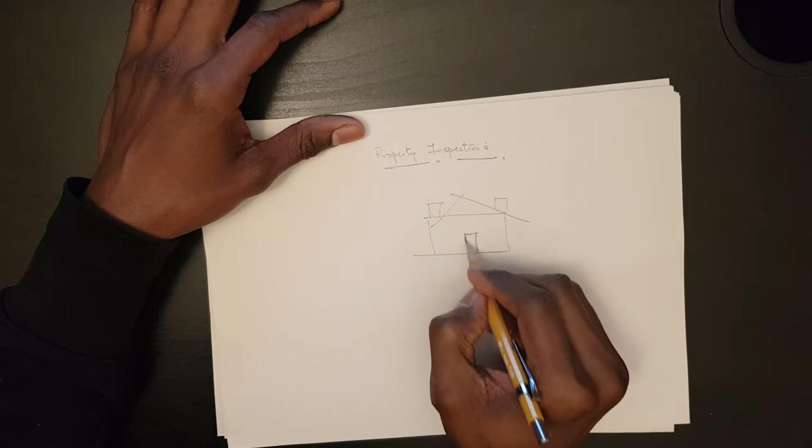You have probably heard the saying that you shouldn't judge a book by its cover, or you shouldn't judge a person merely by their appearance, or you shouldn't judge things on first sight, or that image is not everything. I will say that in general, whilst that advice is understandable on a generic basis in relation to relationships, people, and life, when it comes to investing, that is one piece of advice that you have 100% full permission to go against.

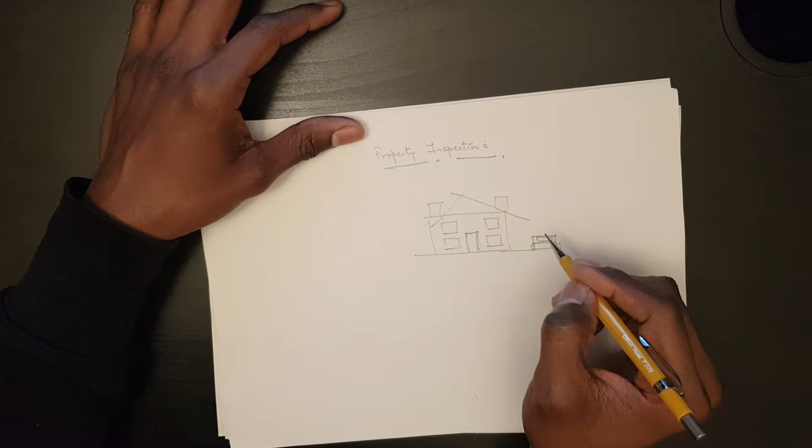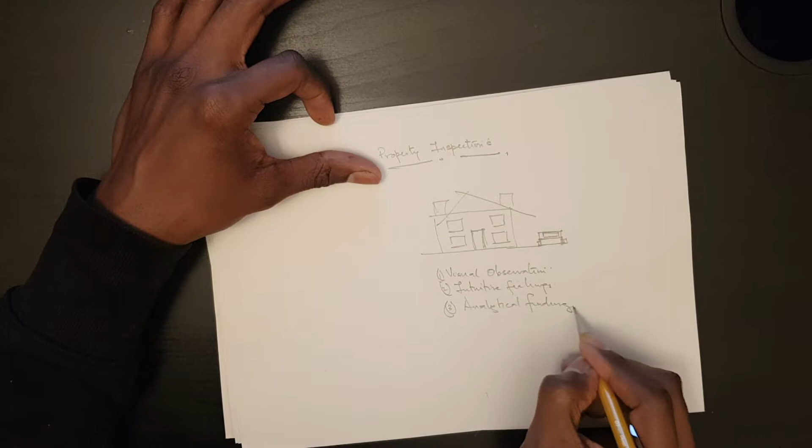You should always and you must always judge a building based on three things. One is your visual observation. The second is your intuitive feelings. And the third, and in my opinion one of the most important, if not the most important, is your analytical findings. These are three things to keep in mind when you're carrying out a property inspection.

So I'll try to build on this, but I believe you already have a relatively sound understanding of buildings, and that has come from living in a building, studying in buildings, working in a building. So what I will try to do is build on the existing understanding and knowledge you have about buildings, and even more importantly, build on the power of your observation and your experience living around structures.

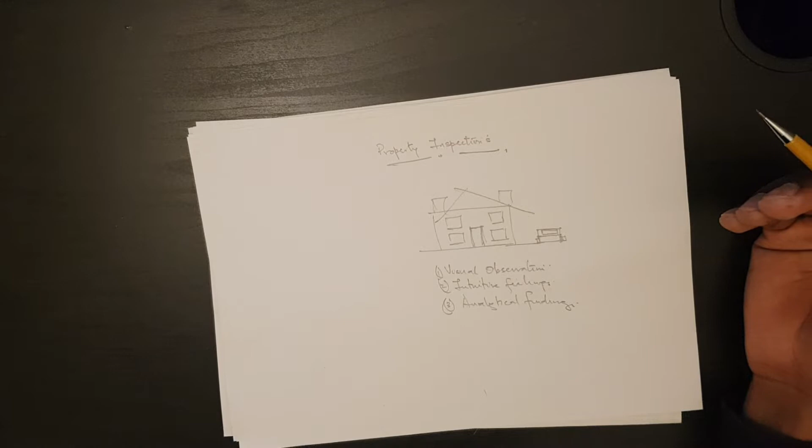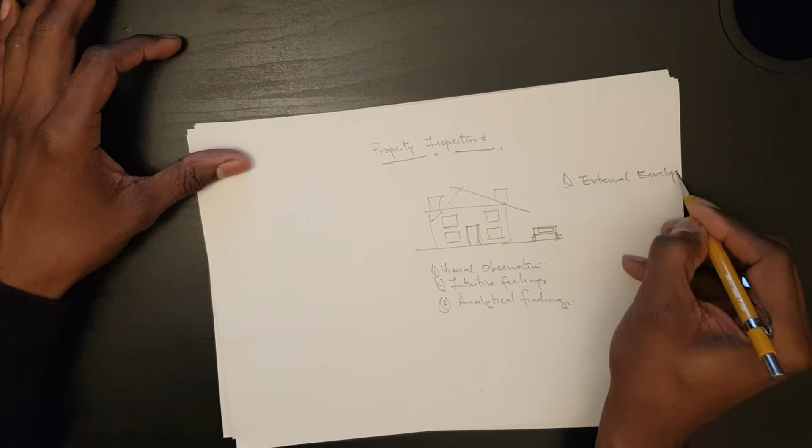Now, a building generally is made up of several parts. So think about this sketch that I have done. The first part is what we call the external envelope. The external envelope is the part of the building that encloses the building: roof, structure, doors, windows, etc. We call that the external envelope.

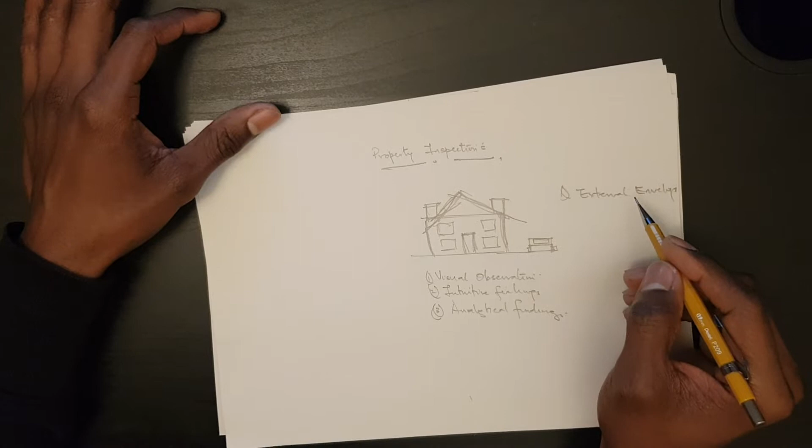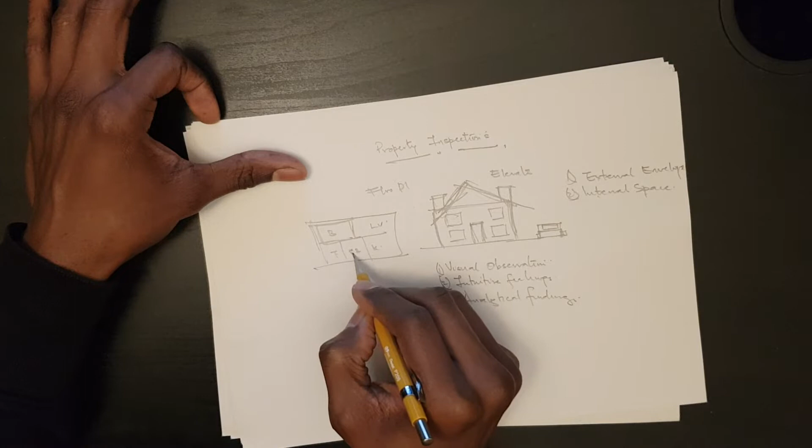The second part is the internal spaces. If this was the elevation and this was a floor plan, the internal spaces would be bedroom, living room, toilet, kitchen, spare bedroom. These are the internal spaces. And number three is what we call the installed services. So a building comprises the external envelope, the internal spaces, and the installed services within the building.

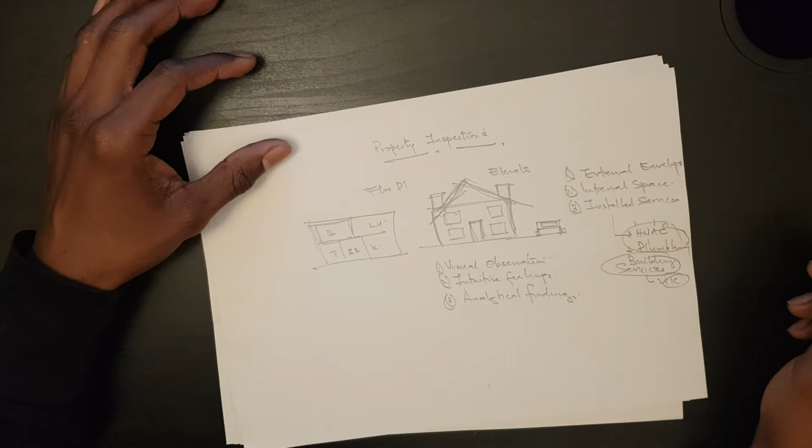The installed services in the USA, or rather in North America, are called HVAC: heating, ventilation, air conditioning, and comfort cooling. And this would also include plumbing. In the UK, we generally call them building services. This is UK terminology; this is US terminology. Building services includes all of the services that serve or supply any form of infrastructure to the building, or sometimes in the UK, depending on the type of building, it's called MEP: mechanical, electrical, public health. And that comprises the installed services.

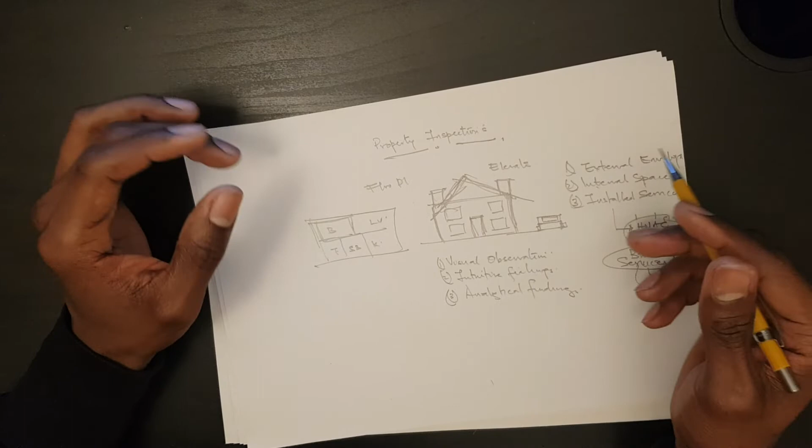Now, for ease of reference, as we go along in today's session, when I say building, I am going to include things such as the land, the structure that sits on the land, including any form of boundary walls, fences and gates, just so that I don't have to keep repeating numerous words.

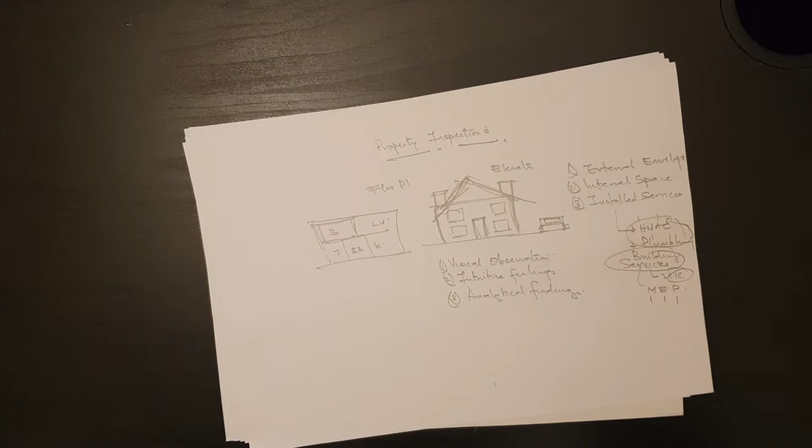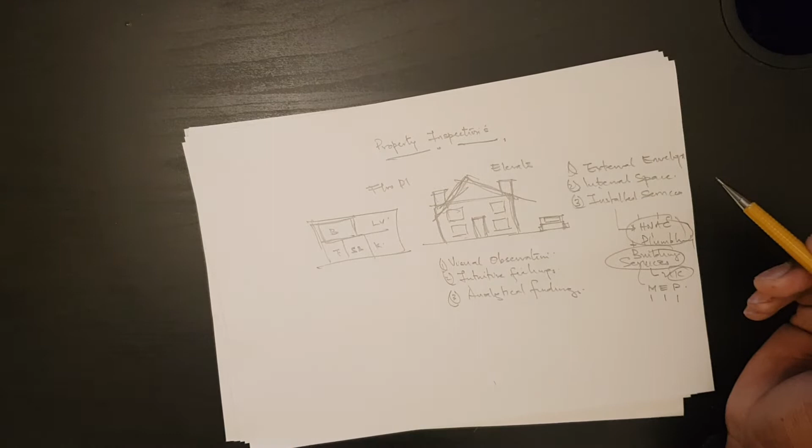Now, this is a very, very important statement I'm making, so try to zero in on it. When you inspect a property, if you're looking to buy a property, the purpose of your inspection is to ascertain the condition of the various parts of the building, and then to determine the current value. So you're looking at condition, value. Call this A, B. C is you're trying to ascertain the life expectancy.

D, you're trying to ascertain the amount of repairs needed. And then E, finally, you're trying to estimate the cost of all repairs that are needed to the building. So these are five specific focus areas: the condition of the building, its current value, its life expectancy, the repairs needed, and the estimated cost of all those repairs. So keep that in mind.

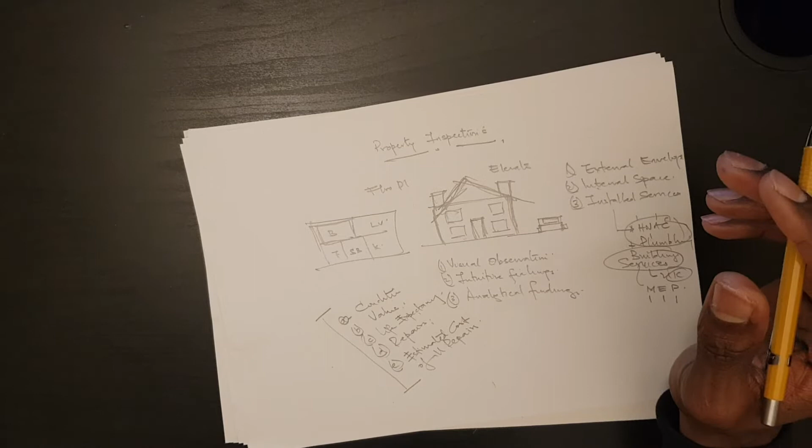Now, if you are a first-time buyer, or if you are purchasing a property with the aid of a mortgage, then your lender will usually arrange for an inspection to be carried out on the property by a competent person. I'll try to explain the reason for that in some detail as we go along. Usually the competent person would be a building surveyor or an engineer.

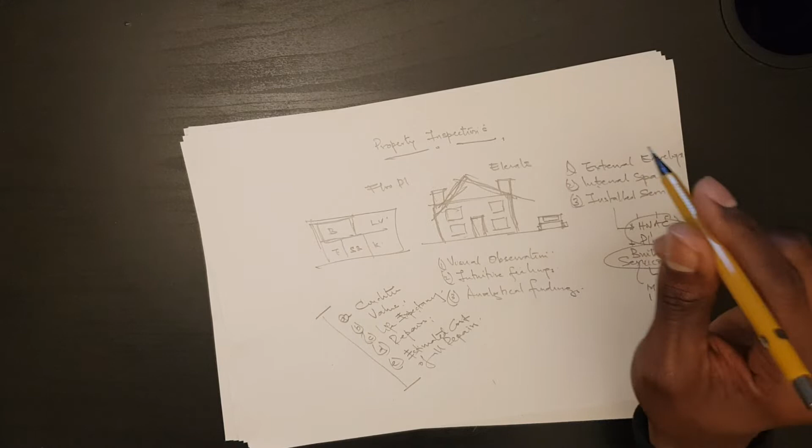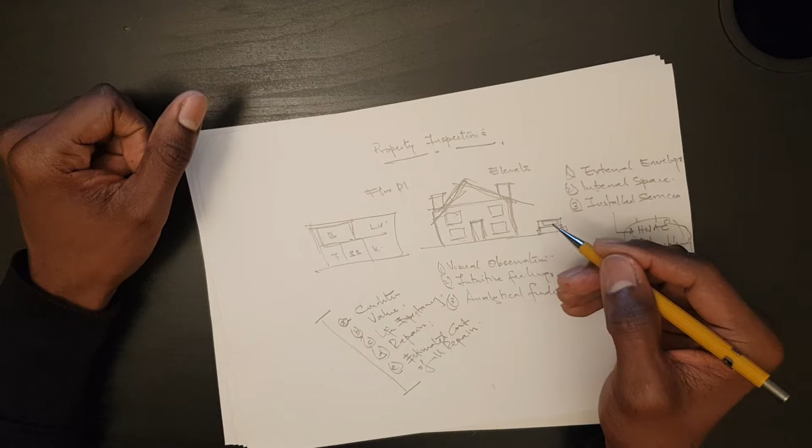Now, if your lender does not commission someone to inspect the property, it's up to you to insist that one should take place. There is a mistake that is often made by first-time buyers or inexperienced investors. People are trying to save a few pennies, and they will normally go for what we call a desktop valuation, or they might go for a home survey.

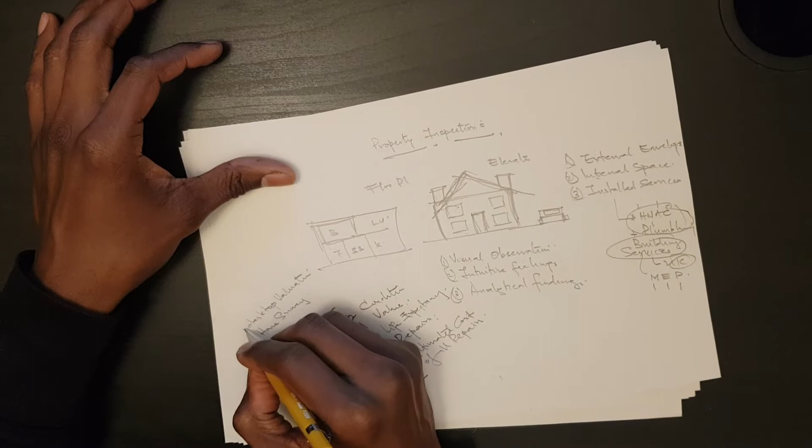All of these are several types of inspections or valuations of the property. Some others might go for what we call a building survey, or some might go for what we call a structural inspection. Each of these have different levels of technical scrutiny. As you would imagine, in descending order, the quantity and quality of information increases.

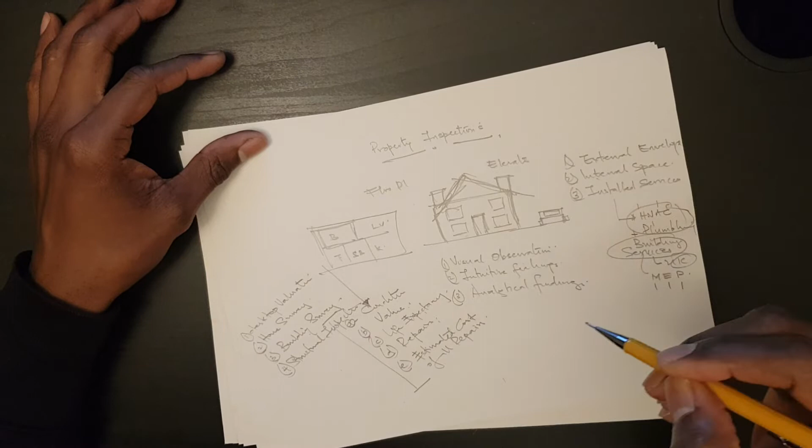So the least thorough inspection is the desktop valuation. This is where someone sits down on a computer and, having looked at the photographs of the property, they decide what they believe the property is worth. And they're doing this on behalf of the bank. A home survey is when they actually come down, but it's very, very surface. It's not detailed. A building survey is a more in-depth inspection. A structural inspection is more of a thorough inspection.

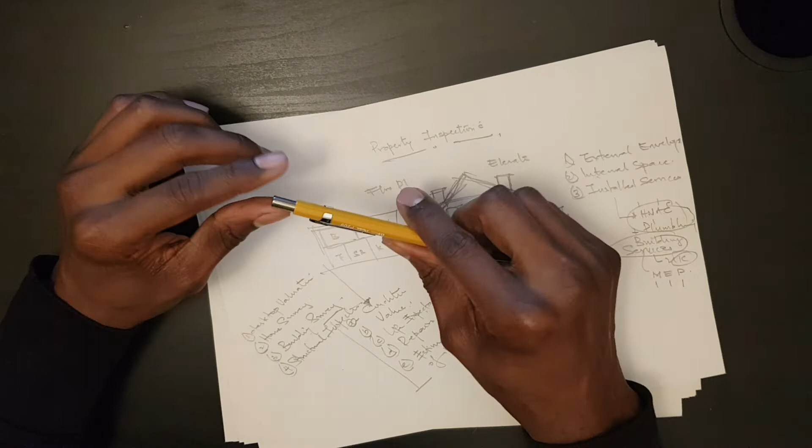So I'll go back to what I said. If you're purchasing a property with the aid of a mortgage, usually the bank, or the lending company, should suggest that you carry out a minimum of a home survey. I would always recommend to you to do something more. But let me just stop there and move on, and I'll come back to this shortly.

Now, if you are purchasing a property without the aid of a mortgage, so you have two buying options. You have those that buy with the mortgage and those that buy without a mortgage. If you're buying without a mortgage, the responsibility for securing a competent person to carry out the works on your behalf will be yours. The bank will not suggest or recommend, because the bank is not involved in the purchase.

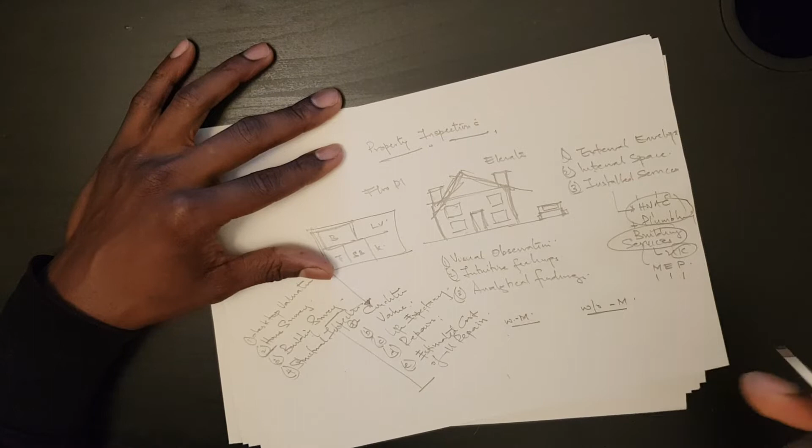Now, irrespective of your funding arrangement, whether you are buying with a mortgage or without a mortgage, I would always encourage you to obtain a full building survey. A full building survey. I would invite you to do this rather than a home buyer's survey, or rather than a valuation survey. Between a desktop valuation and a home buyer survey is what we call a valuation survey.

A valuation survey is even less technically detailed in comparison to the home buyer survey. So I would encourage you to always obtain a full building survey rather than home buyers or valuation survey. And the reason is because a full building survey is more detailed and it provides you with better value.

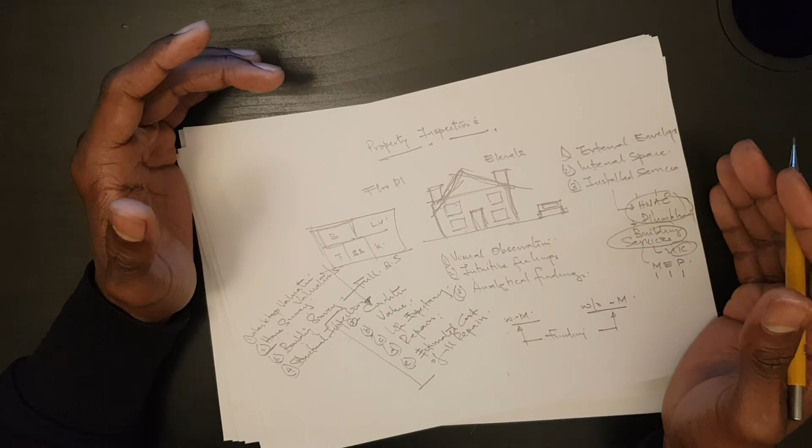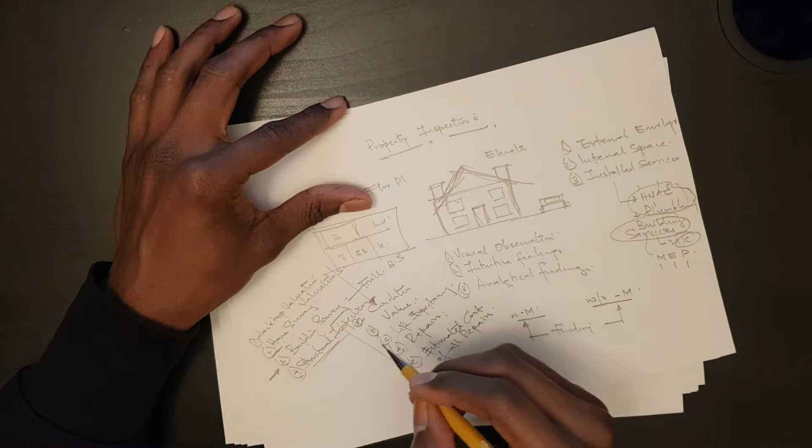If you are buying a period building or a large building, or you're buying a building as a whole, or you're buying a building in parts, if that part of the building you're acquiring is part of a much larger building, I would always instruct you, and I would always recommend a structural inspection. Now let me say that again. As a minimum, you should be carrying out a full building survey.

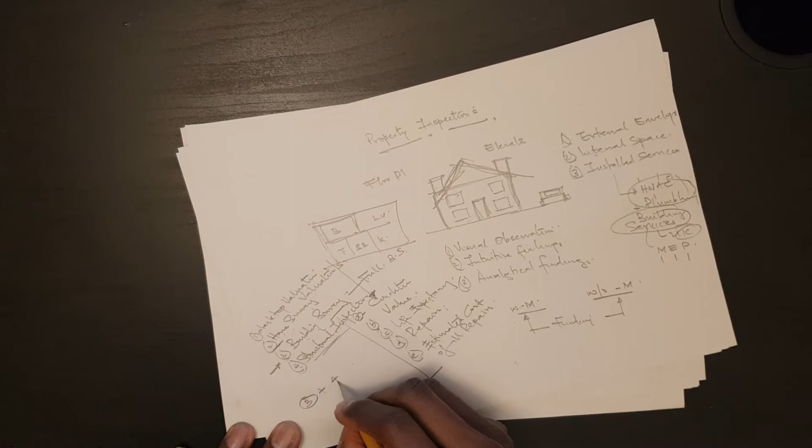But if the building you're buying is a period building, it's an old building, or if the building is a large building, or if you're buying a unit in a large structure, then I would always recommend a structural inspection in addition to the full building survey. So what I am saying here is I would recommend number 3 and number 4 for period buildings or for large buildings. Period buildings usually refer to buildings of a certain time period in the United Kingdom.

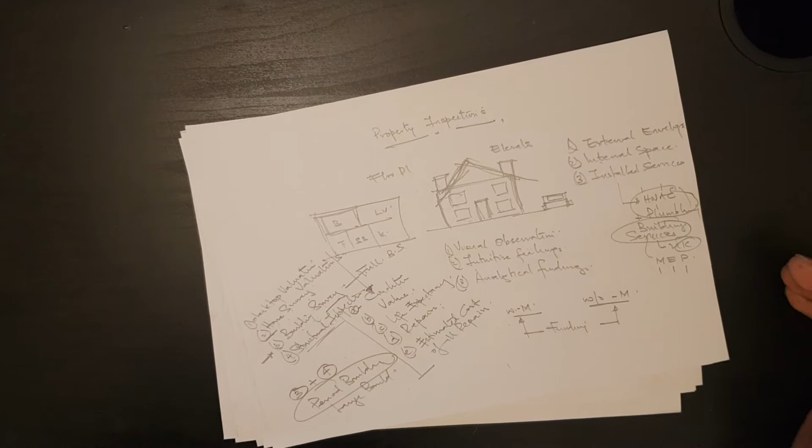We have different types. These primarily were pre-war buildings before the First World War, and therefore most of these buildings are more than 100 years old. So from a structural perspective, taking into account the age of construction and the amount of use, such buildings may have deteriorated or dilapidated, hence the importance of a structural inspection.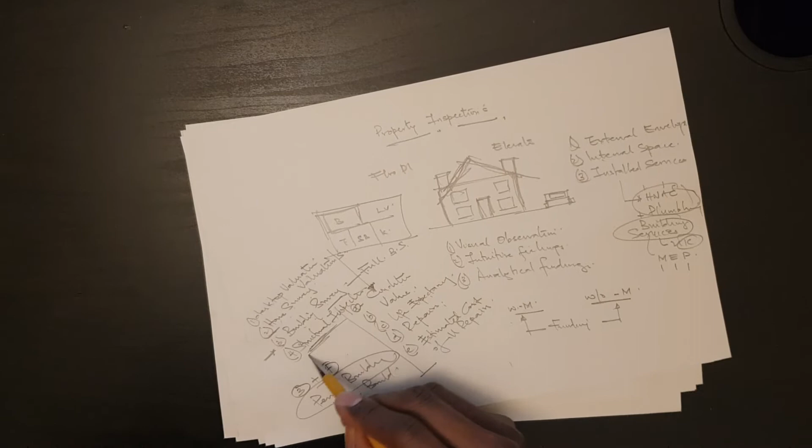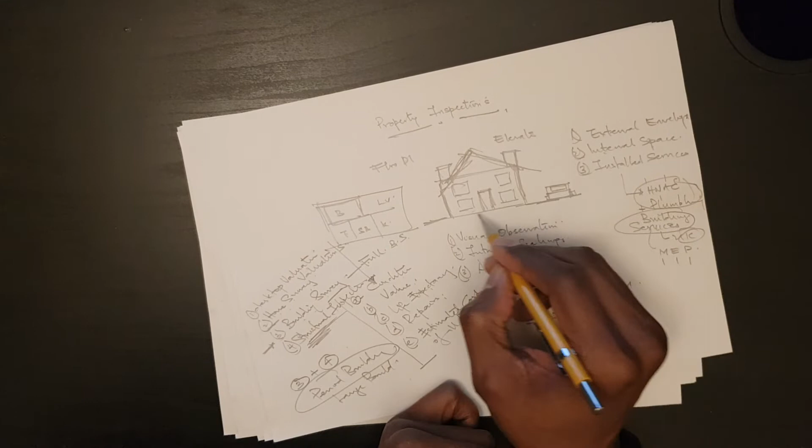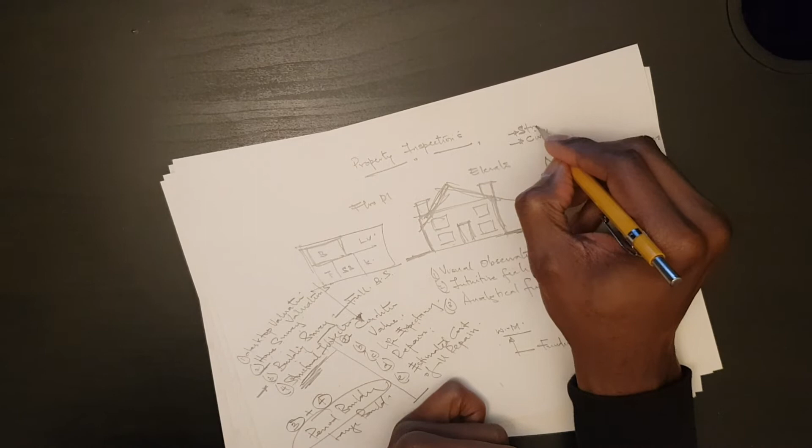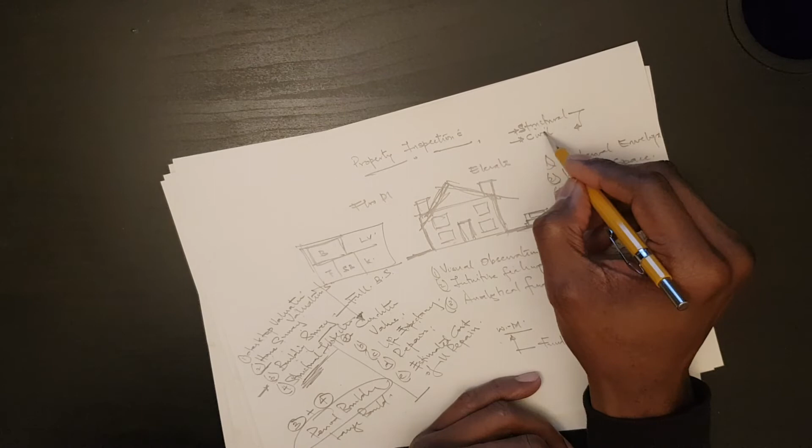Now, I should also say this, a structural inspection is a more detailed, in-depth inspection of the integrity of the structure and the grounds. Not just the building itself, the structural engineer will look at the grounds. Usually this will be done by someone who is a structural engineer or a civil engineer. Structural engineering is simply a branch of civil engineering. It's a specialization of civil engineering, but you begin generally learning the same things. So a civil engineer can carry out the same works. A structural engineer can carry out the same works.

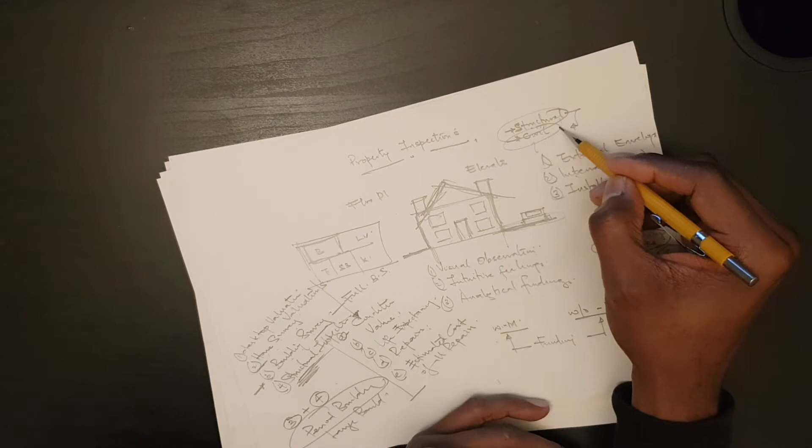Usually civil engineering is best for anything to do with the ground or below ground. Structural engineers tend to focus more on the structure itself. But what you tend to find is there is a cross-fertilization between both roles. Some people start out in civil engineering and move into structural engineering, and vice versa. But I would simply say, if you're buying a complicated building, basements, lower ground, unique soil condition, you need a civil engineer. If it's a simple building, no basement, no cellar, no lower ground area, straightforward, then a structural engineer should be able to deal with the inspection on your behalf.

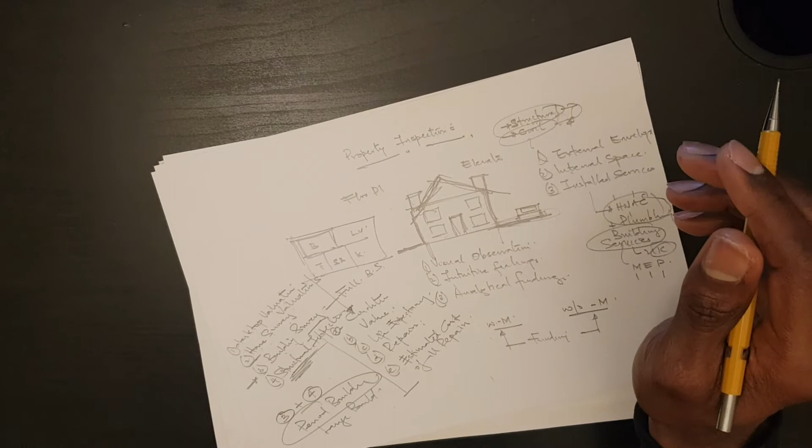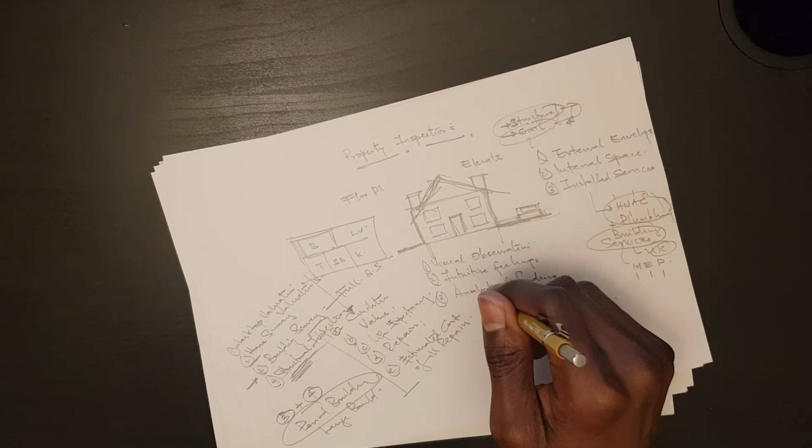You should also be aware that it is up to you as a buyer to satisfy yourself as to the state and the condition of the property. And even if you're buying with a mortgage, it's up to you to be aware and satisfy yourself as to the state and the condition of the property. And the reason is because you will have no legal claim against the seller or even the lender.

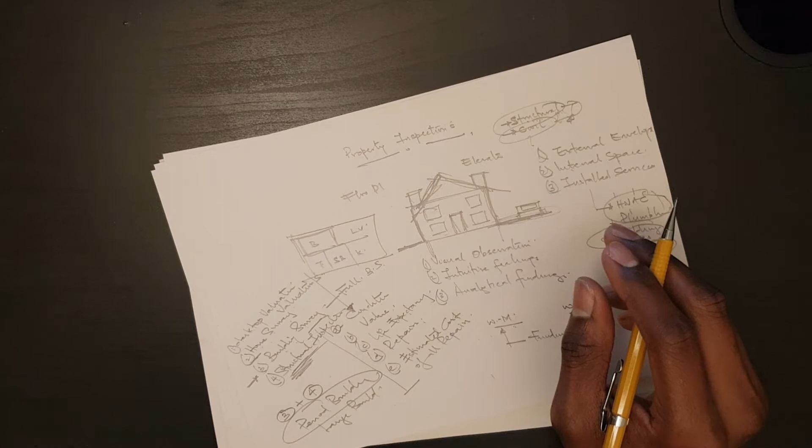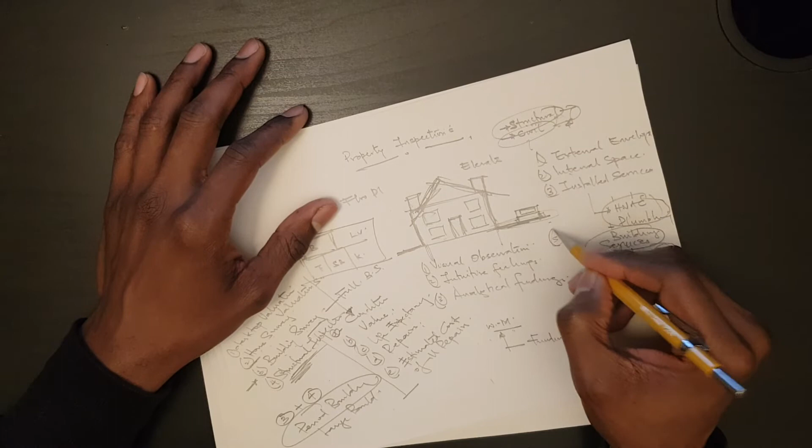Should you find out in the future that there are defects with the property, once you've completed the purchase, if you discover for some reason that there is a significant structural defect, the seller, once you've signed the contract, which means you've completed the sale and you've exchanged, the seller will bear no liability. In addition, even if you've used the mortgage,

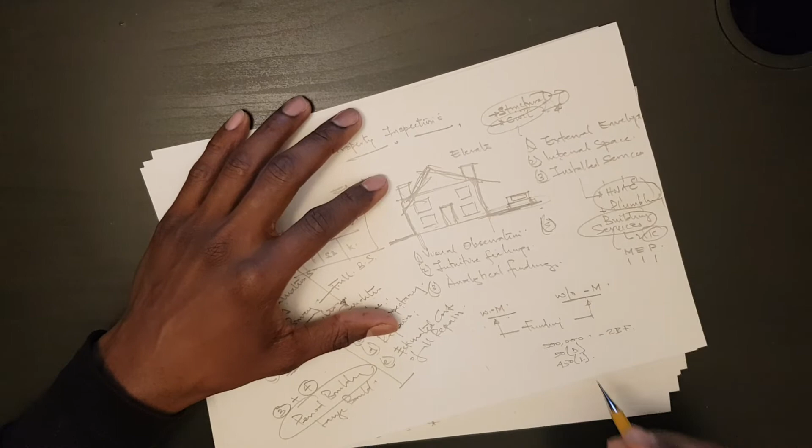remember, let's say you're buying a property and it's for £500,000, a 2-bedroom flat. You've put down £50,000 as your deposit. The bank has given you £450,000 as a loan. If there is a defect, and if that defect is severe, according to the terms of the mortgage, you will still have to meet the mortgage obligation. The bank bears no responsibility for that failure to recognize and understand the significance of the responsibility that should have been yours.

Now, whether you're buying a property with cash or whether you're buying with the aid of a mortgage, the building inspection by a professional usually takes place after the offer has been made to the seller and after the offer has been accepted by the seller. I'm going to go through a few things that I think will be useful, what I call a chronology of events. The inspection takes place typically after you've made an offer and after the offer has been accepted.

Now, my aim in this session and in this series is to provide you with enough information so that by the time you are making an offer, you would have considered every single thing that potentially, and in my opinion, will be highlighted by the professional in their inspection report. Now, here's what I'm saying. Let me draw a timeline. It's called a timeline because it's a time on a line.

Let's say you see a property, you make an offer, the seller accepts the offer. If you're buying with a mortgage, usually the inspection works are commissioned here. So there is a time delay. And what I'm hoping to do is bring back that knowledge that the surveyor or the structural engineer will be giving you in his report. I'd like to bring some of that back to this point so that before you even make the offer, you've considered some of the things that will be discovered in the future.

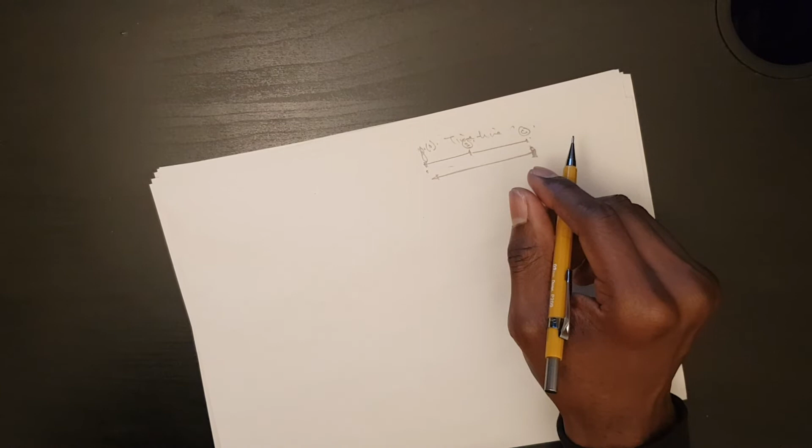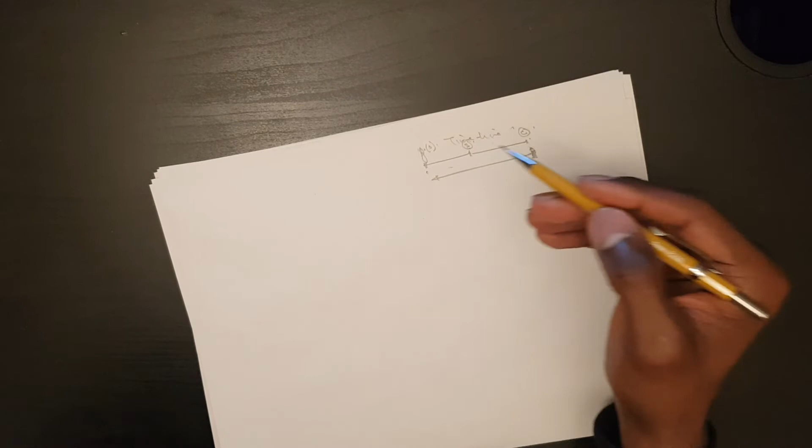Now, if you have this knowledge, especially in advance of your viewing, you would be in a much better position to prevent any buyer's remorse, to prevent you from incurring any unnecessary, non-refundable costs. And the reason for this is because if you find a property and the offer is made and the offer is accepted, usually as part of the bank processing the mortgage application, you would have to pay a mortgage application fee. At that time, you would have appointed a solicitor, and the bank might commission a surveyor to carry out the inspection.

Now, all of this knowledge I'm sharing is to ensure that you're not wasting money and time on a property that is not suitable to your needs, especially if the property has issues. Now, depending on the circumstances, it takes about 3 to 5 weeks to receive a professional report, evaluation, a home buyer's or building survey report. Now, this timeline certainly can be shorter than 3 to 5 weeks.

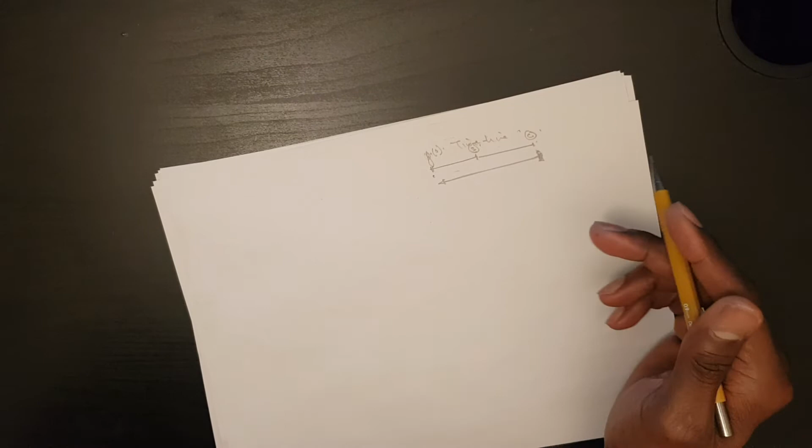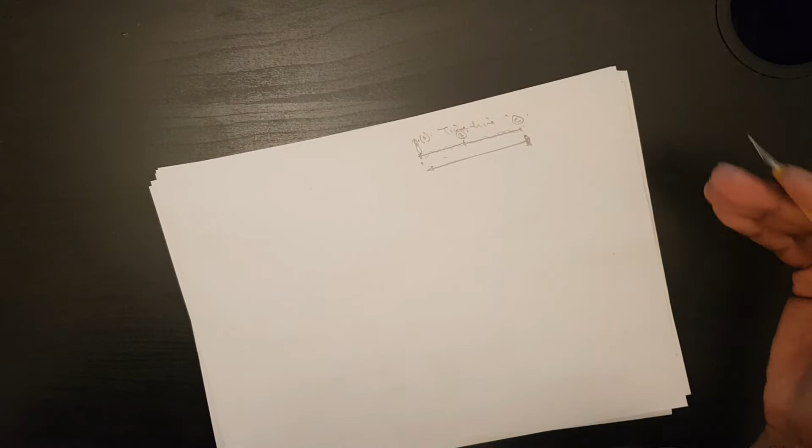If you're buying in cash and you're instructing the works yourself, then it's possible to have this done almost immediately. But when you're buying through a lender, because the process has to go through their system, you do have some delays. It's what you find in most bureaucratic organizations or institutions. There will be delays, and that's the reason why it takes 3 to 5 weeks. Typically, it takes about a week and a half for the surveyor to produce their report. But it takes maybe a week for the bank to commission the surveyor, and then it takes a few days for the surveyor to come down to site, and then they produce their report, and hence the delay.

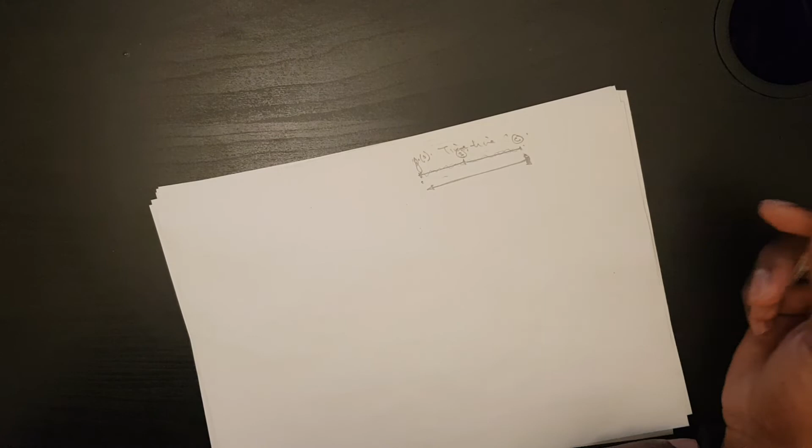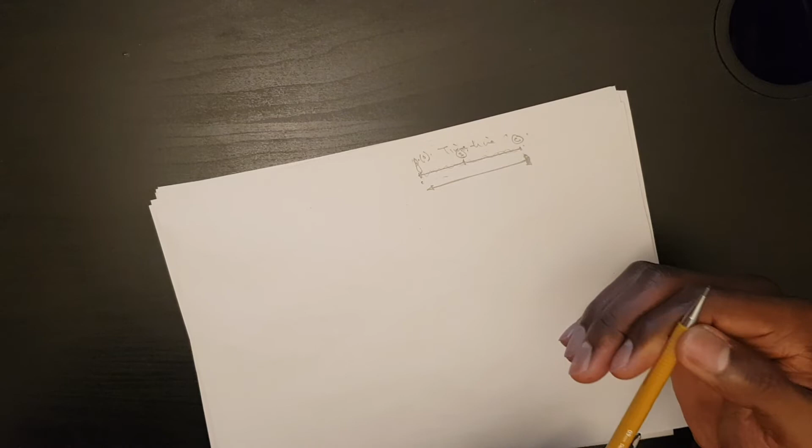Three weeks, in my opinion, assuming it's three weeks, is a long time to wait to find out that there are major issues with the property. On the other hand, if what I'm sharing in this series is beneficial, then what that would mean is that on the first viewing, if carried out properly, following these instructions and these teachings, you would know immediately if the property you are looking to buy is the right one, and you would know if you are making a prudent purchase, and even whether you should be proceeding with an offer.

Now, for most lenders, like I said before, the home buyer's survey is mandatory. It's mandatory for most lenders because it's a precautionary due diligence process, because the bank is going to be using a significant part of their capital for the purchase. So most good banks and most good lending organizations or building societies or creditors will instruct a survey. But I have also seen some banks that are happy to proceed without making it mandatory. They will usually be happy to go with a simple desktop valuation assessment.

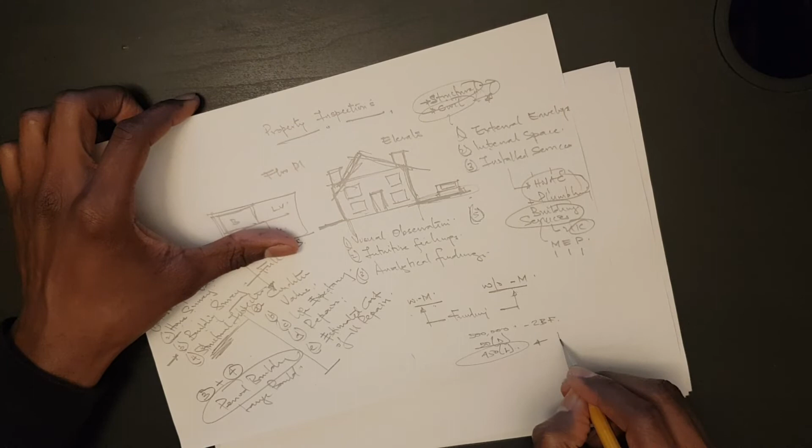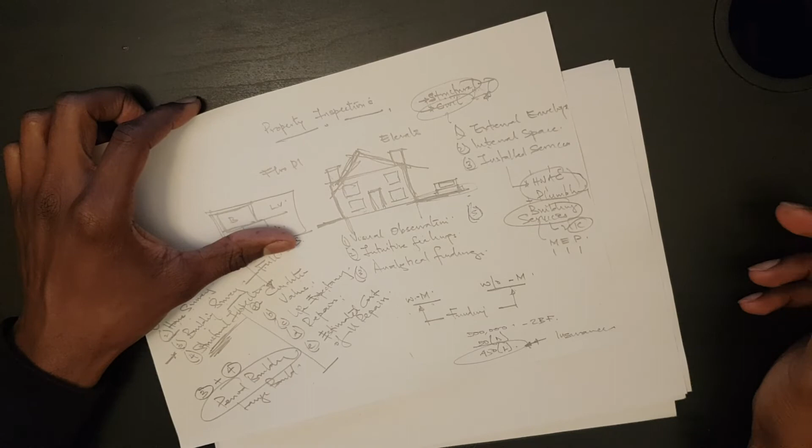One of the reasons that is possible is because, keep this in mind, when the bank makes a loan to you, the bank also insures. They buy insurance on this. So even if the property turns out to be defective and there are issues and you can't make your credit commitments, the bank is still insured. But the good banks will make sure that they instruct you to proceed with a survey before they process their loan advance.

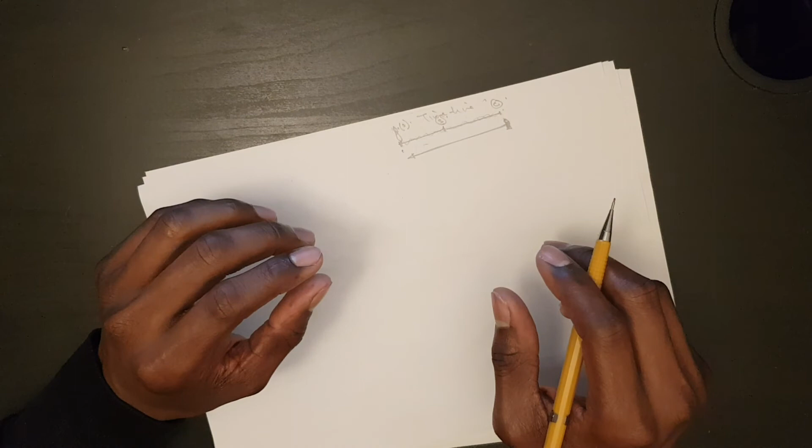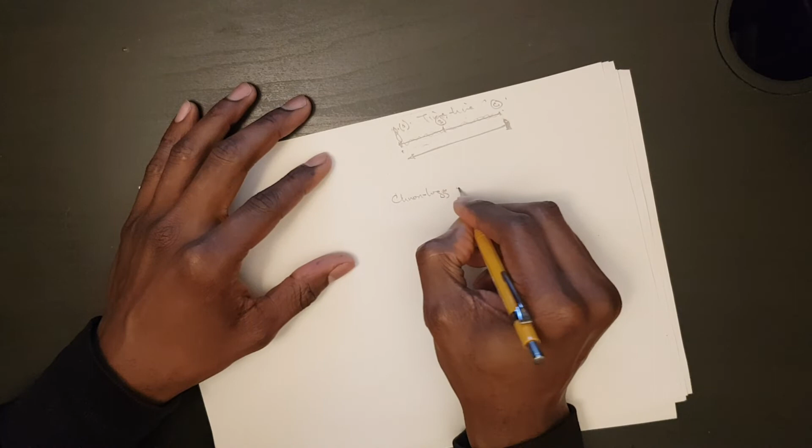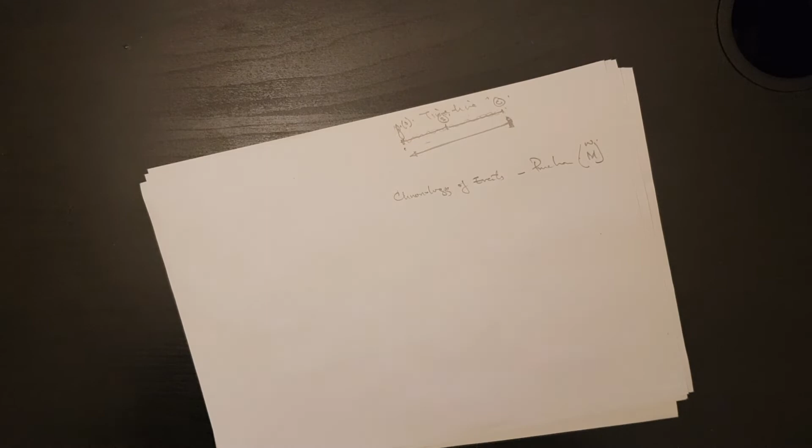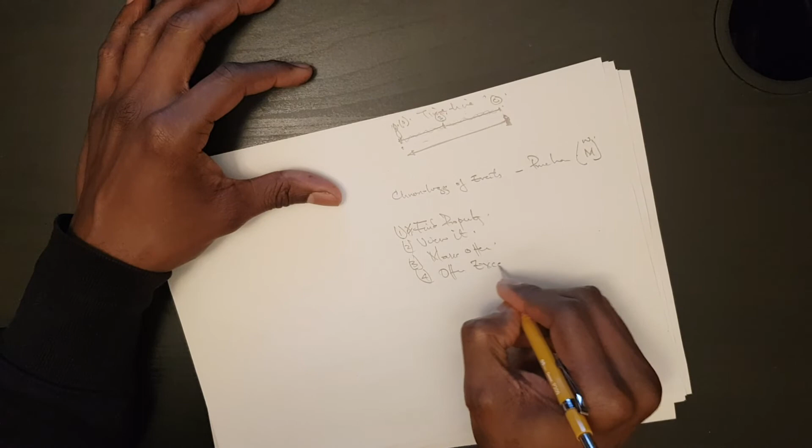I guess a right way to bring today's session to a useful close will be to go through what I call the chronology of events when you're purchasing a property with a mortgage. These are from my experience. Step 1, you find a property. Step 2, you view the property. Step 3, you make an offer. Step 4, offer accepted. Or it can be rejected, but let's just proceed on the basis that the offer is accepted.

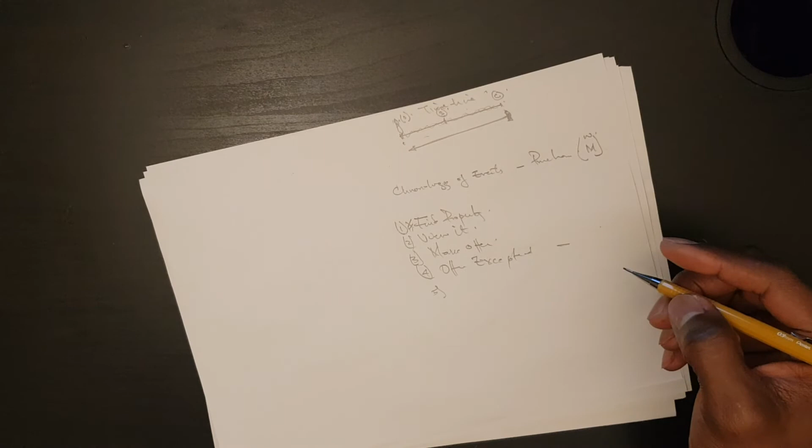Step 5, your mortgage is agreed in principle by the lender. This is where the mortgage company says, yeah, we're happy to loan you 450,000 for the purchase in principle, subject to all of the conditions that come with the mortgage, such as affordability, the property being worthy of the loan, etc. Step 6, the lender instructs a survey. Step 7, the survey is carried out by the surveyor. Step 8, the survey report is issued.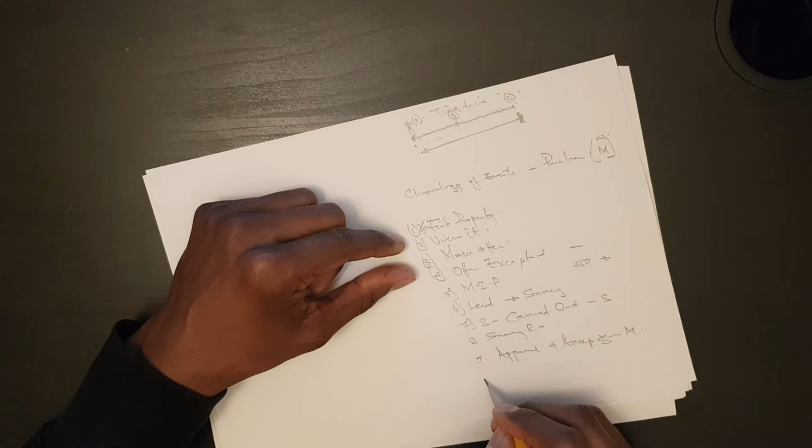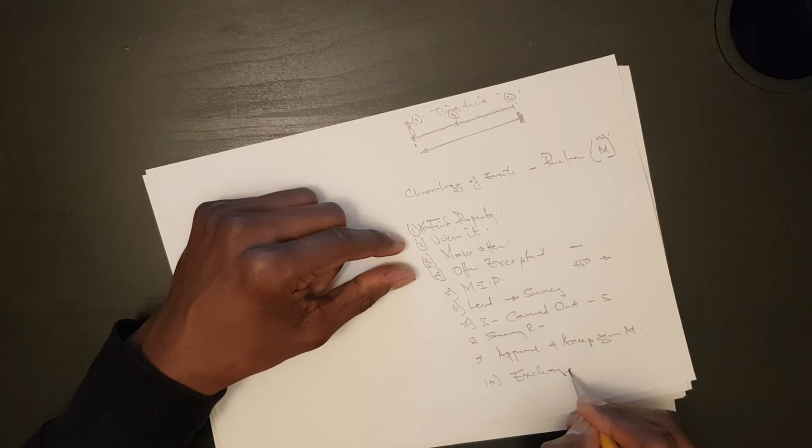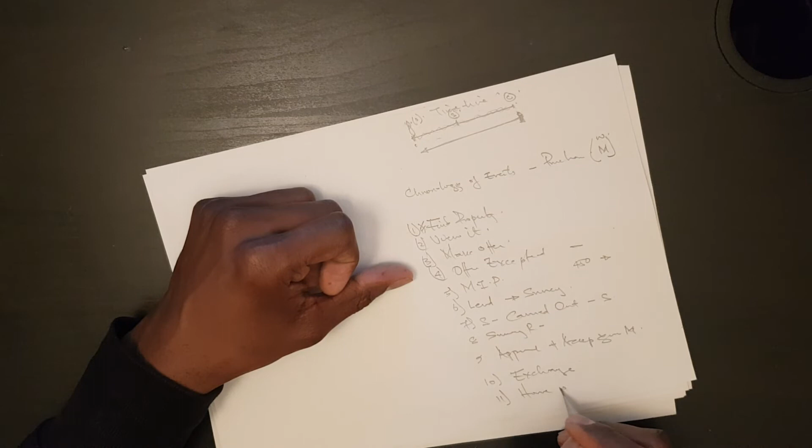Step 9, the lender approves and accepts your mortgage if the report findings are favorable. Step 10, the legal contracts are exchanged. So we call this exchange. Step 11, the home is yours. Now, these are some of the steps that you will go through if you're buying with a mortgage.

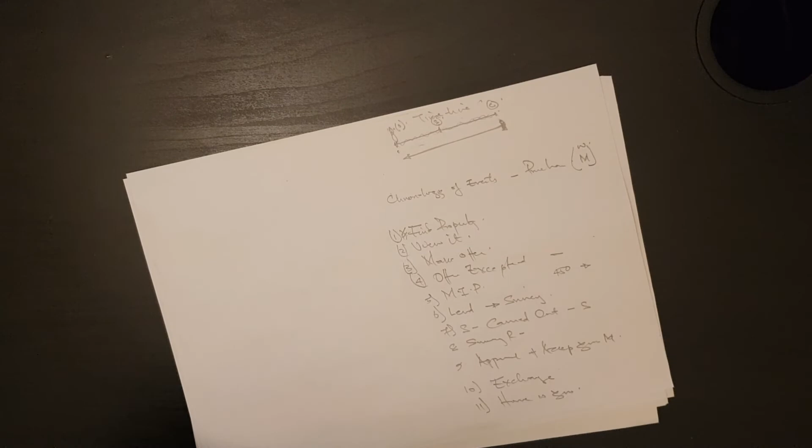Now, for purchases that are made without the aid of a mortgage, it's vital that you still seek professional guidance and make sure you have a professional on your team to inspect the property on your behalf before the sale is completed. Even if you have some technical expertise in the building industry, I tend to find that someone who is independent and unbiased and has no emotional attachment to the property could serve as a useful devil's advocate, just to make sure that you're not overlooking certain things simply because you're emotionally attached or attracted to the property.

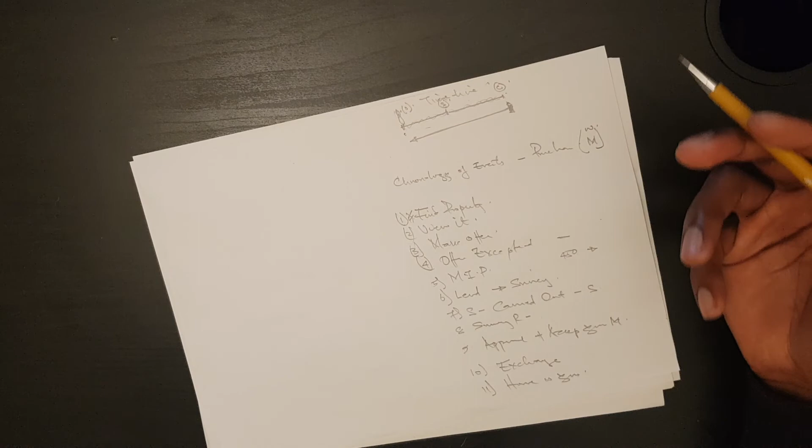This advice tends to be ignored by people who buy in cash. I've seen this a number of times. People who have wealth move forward with their investment purchase independently and without any professional advice. Seldom have I come across any of those cases where the person did not acknowledge at some point in the future that it was the wrong decision. If you have no building experience and you purchase a property, especially a period building, a converted building or a building with a basement or lower ground floor, without any professional advice, I think you're taking on a risk that is unnecessary.

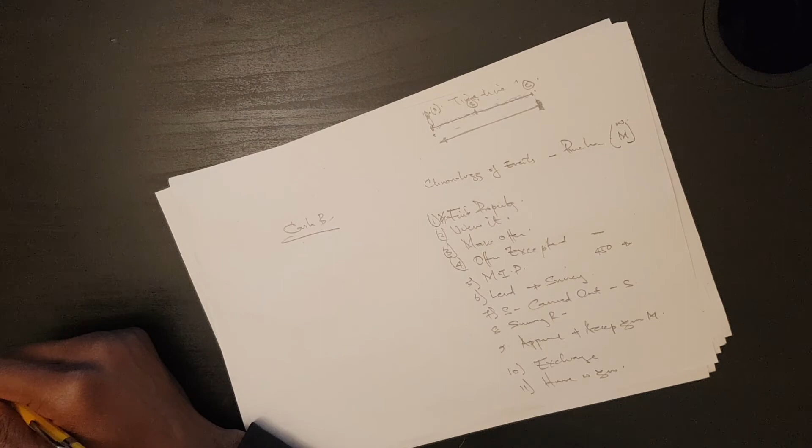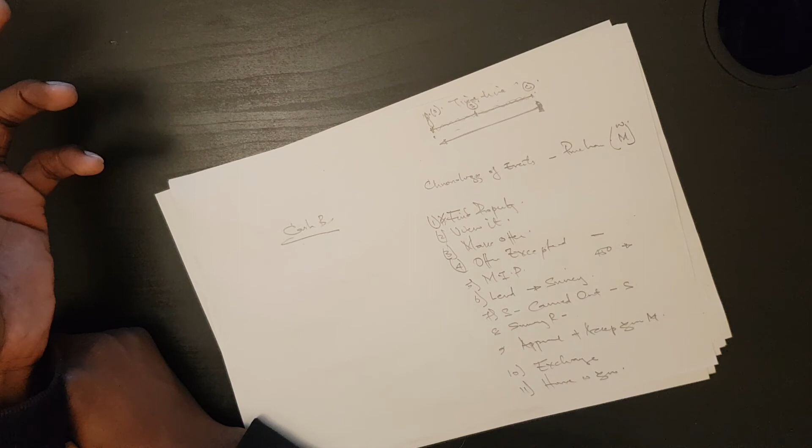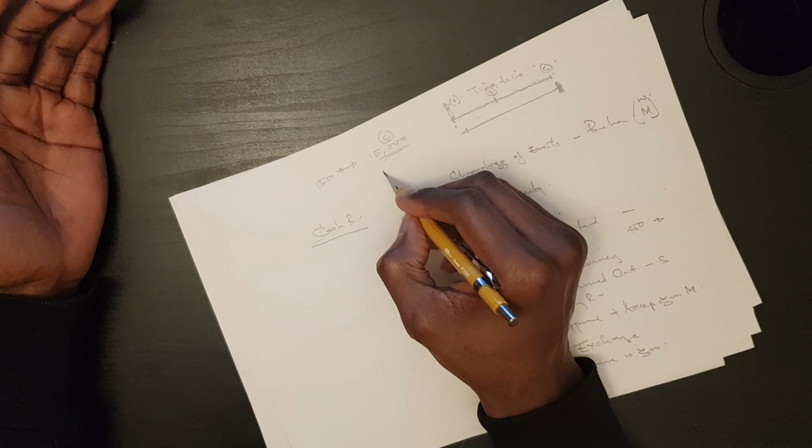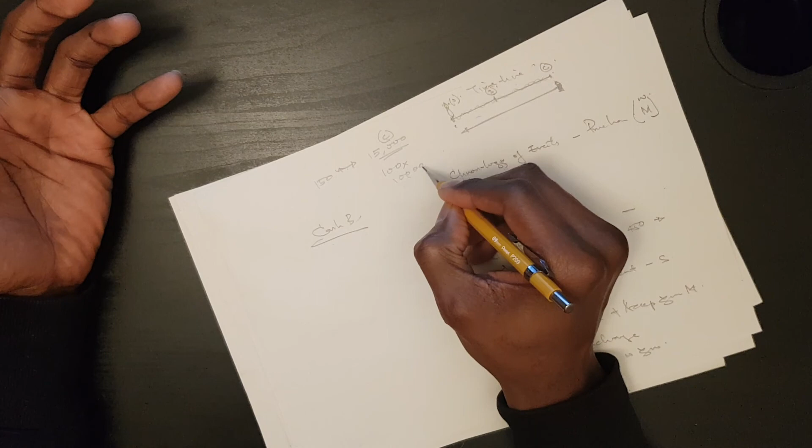Some people refuse to pay for the full building survey because they're looking to save an extra £150, which is such a small amount when you take into account that if something is missed, you could be left with a cost in the region of about £15,000. So you save £150 by going for a simple home buyer survey or a desktop survey, and then sometime in the future you realize you've incurred a cost of £15,000. Because of the mistake you made, you've incurred a cost that is 100x, or 10,000% higher than the price you should have paid.

So let me stop there for today, and in the next session I'll go into more detail on some other items.